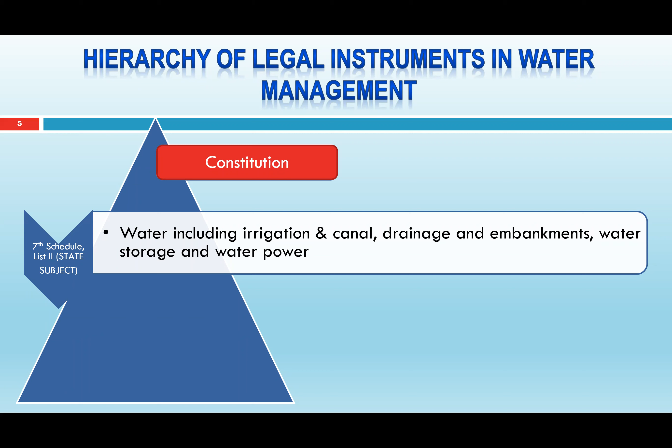But there is a catch in this. As per the 7th schedule, list 1, there is a central subject - when there is a concern of regulation and development of an interstate river. For example, take the Krishna River, which is an interstate river flowing through Maharashtra, Karnataka, Andhra Pradesh, and Telangana. If any one state wants a big project on this river, concurrence of the other states is required.

That's why this becomes a central subject. So if a river is an interstate river, then approval needs to be obtained from the central government with proper concurrence of the other states. And if central government makes an act in parliament that some project has to be executed which will have wide development, then such projects are also treated as a national project. In that case, central government jurisdiction comes into picture.

So basically, as per our constitution, water management is dealt with by the state government, and if there are policy matters or interstate matters, then the subject is dealt with by the central government.

At the second point in this pyramid, there is a national water policy which was published in 2012 by the Ministry of Jal Shakti, Government of India. A draft national water policy is also available on the website, which was published for public opinion and can be reviewed. Very soon we will have a new national water policy.

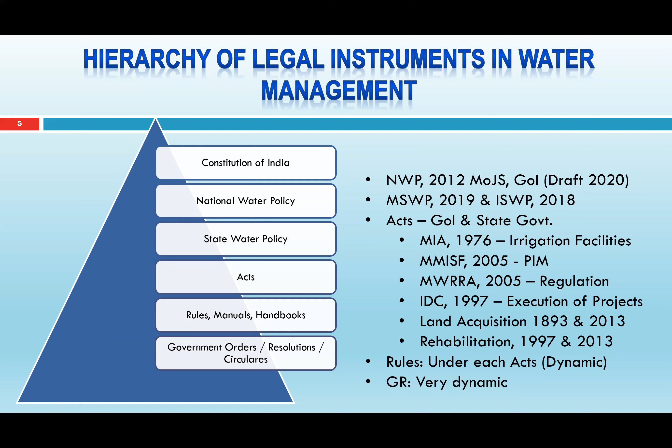So whatever change, suppose any financial power is to be given, that financial power cannot be mentioned in the acts because it is a dynamic figure. It varies because of inflation and several other factors. So such numbers are never mentioned in the acts or rules, and for that GR, or government resolutions, are used. So we will discuss briefly this Maharashtra State Water Policy.

The first Maharashtra State Water Policy was enacted in 2003 and revised in 2019. Its objectives include ensuring clean water and sanitation within the state, building resilience for water scarcity and drought, and having judicious and strategic sectoral allocation. This is a very difficult area to manage.

Sectoral allocation means allocating water for each sector. There are several sectors, for example drinking water sector, agriculture sector, industry sector, environment sector, and so on. So there is always competition between these sectors, and water management is very challenging because available water is limited and each sector demands more and more water.

For example, in Pune city, all the dams constructed on the upstream side of Pune city were planned for agriculture purpose. But as the city developed, the agriculture water has been transferred for drinking purpose. So this diversion of water from agriculture to drinking purpose is a very challenging situation, and it needs to be handled very rightfully without violating anybody's right.

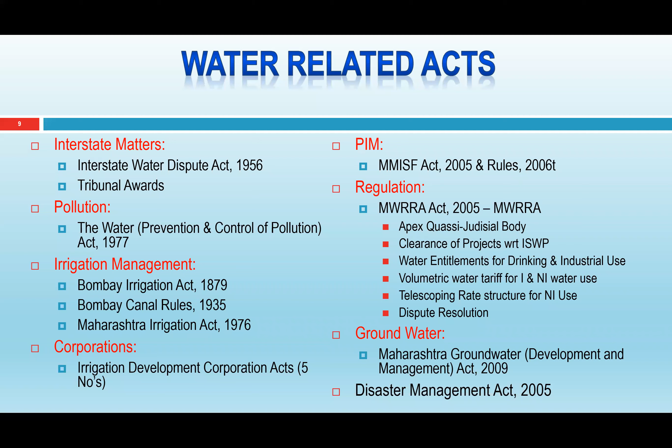In Maharashtra, in 2009, the Maharashtra Groundwater Development and Management Act was enacted. Over and above, there is a Disaster Management Act, which has provisions regarding floods, droughts, and other disasters caused by water.

Participatory irrigation management is a big upcoming area, and to enhance or promote PIM, Maharashtra decided to formulate Water User Associations. WUAs are mandatory for all ongoing projects, and the size of a WUA depends on the area of land holding - for 500 hectares there is one WUA. It is a body of persons including male and female landowners, and this body manages water within their jurisdiction, following tail to head irrigation.

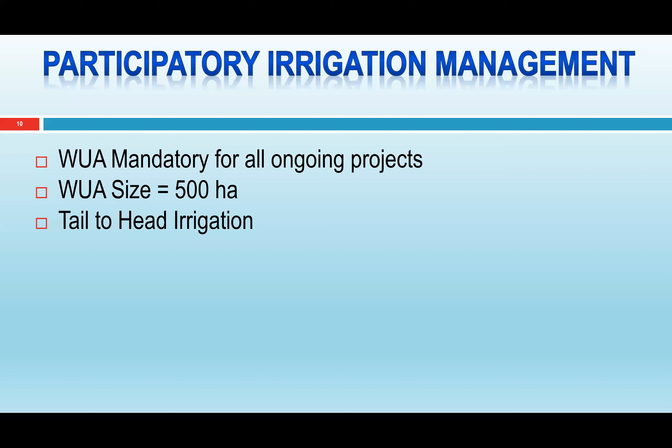If water is released from the canal, it will reach the tail part first and then come to the head. As per water pricing policies, there are concessional water rates for WUAs to promote their formation. Also, an important feature is that we supply water on a volumetric basis. Whatever water charges the WUA gives to the government, 50% of that is refunded to the WUA so that their O&M, operation and maintenance, can be made from these water charges.

Women participation is mandatory as per the Act, and this WUA has crop freedom. This is a very important concept because the Maharashtra Irrigation Act has stringent policies regarding taking up crops. As per this act's provision, the superintending engineer has to make a declaration to all farmers to grow a specific type of crop, and if any farmer does not follow the orders, the superintending or executive engineer is authorized by this provision to not approve water for that farm.

But as per the MMISF Act, the farmer is given crop freedom, so the farmer can grow any type of crop provided that a specified quantum of water is supplied, and he has to manage the entire cropping cycle within that quantum of water. Its structure is a 4 tier structure, which we will discuss in the next slide.

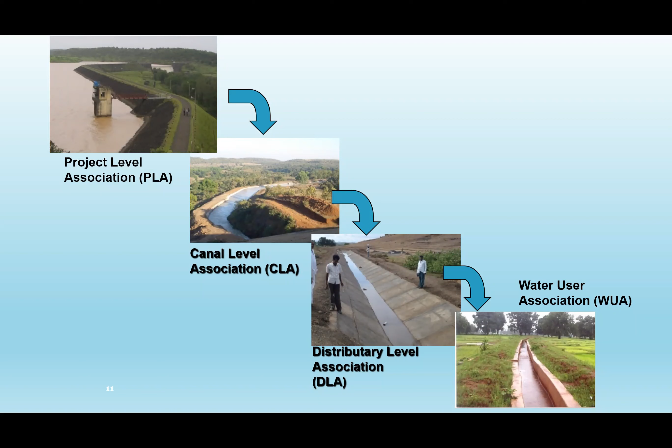Another important policy executed by the Maharashtra government is the piped irrigation network policy, adopted in 2017. As per this policy, instead of conventional canals, a piped irrigation network is proposed. This PIN is successfully implemented in the Tembhu project and is being implemented in the Gunjawani project. In Tembhu, it's a hybrid system, part conventional canal and part covered by PIN, whereas in Gunjawani, water is supplied through pipe network within the entire command area. I will show a small 5-minute video on the Gunjawani project in the upcoming slides.

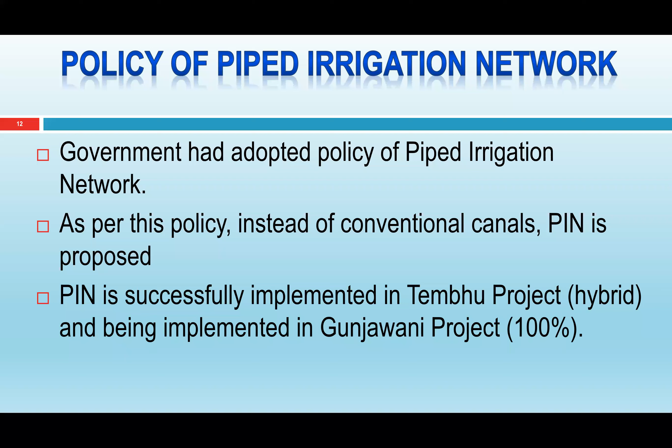So we are clear with the legal mechanism. Now we will discuss water governance.

Water governance is a 3-tier structure. At the top is the Ministry of Jal Shakti, Government of India, whose role is to formulate policy matters, clear interstate rivers or interstate projects, and resolve disputes between various states. At the second level, we have state government, and as per our constitution, water resource management is entrusted to the state government.

Generally each state government has two departments: one managing surface water and another managing groundwater. As per another amendment in the constitution, local self-government has been formed. This local self-government, like Zila Parishad and Panchayat Samiti, manages irrigation projects through their minor irrigation department. So basically we have a 3-tier structure of governance.

At the top level is the Ministry of Jal Shakti, which formulates policies and resolves issues between various state governments. At the middle level is the state government, and at the lowest level is the local self-government.

For Maharashtra, there are several agencies responsible for managing water. For example, the Maharashtra Water Resource Department, the department in which I am working, manages irrigation projects having irrigable area more than 600 hectares. Then we also have the Water Conservation Department, which implemented the Jal Yukta Shivar scheme.

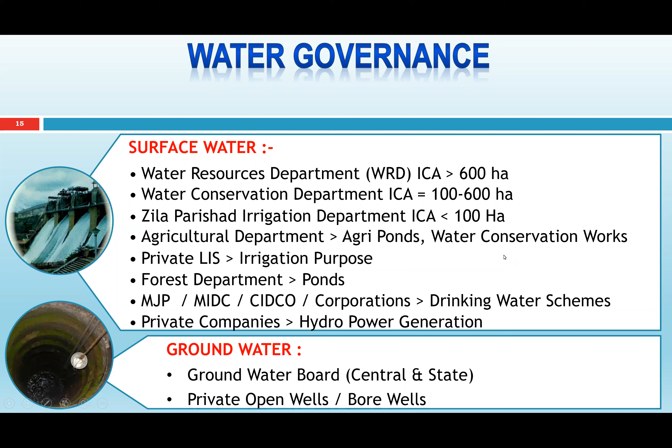In very brief, I will discuss the organization structure of the Government of Maharashtra Water Resources Department. In order to take all policy decisions, there is a Mantralaya, headed by the minister and state minister, supported by the principal secretary, secretary and subordinate staff. The department also has a Chief Engineer for Hydro and Quality Control, a Chief Engineer Electrical managing hydro projects and lift irrigation schemes, and a Chief Engineer Mechanical at Nasik.

At the second level we have the Design, Research and Training wing, headed by the Director General and supported by chief engineers and superintending engineers.

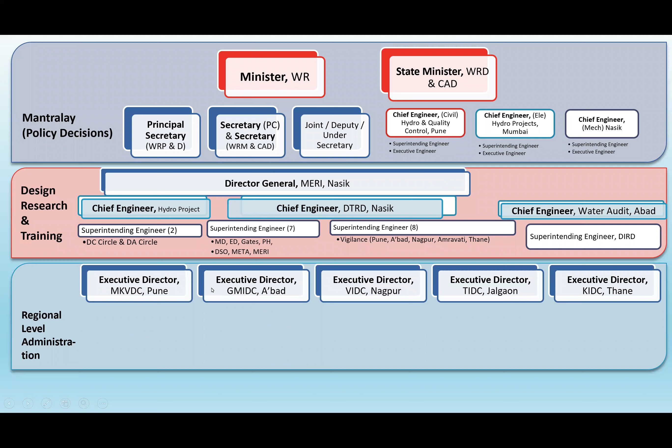At the third level we have regional level administration, with 5 irrigation development corporations headed by an executive director, located at Pune, Aurangabad, Nagpur, Jalgaon and Thane. These IDCs are supported by chief engineers and superintending engineers, and at the lowest level for execution of works and water management, there are superintending engineers, executive engineers, deputy engineers and sectional engineers. This encompasses the governance structures in Maharashtra.

So in the second part, we will discuss the water infrastructure.

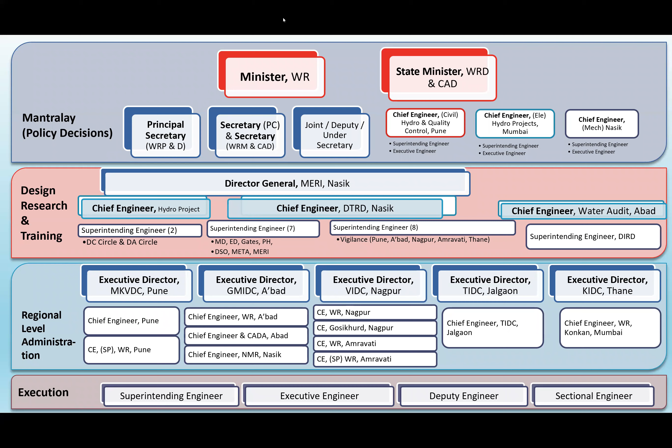Okay, good. I think I have nearly less than 1 hour, so I will go a little fast. In this part, we will discuss the water infrastructure.

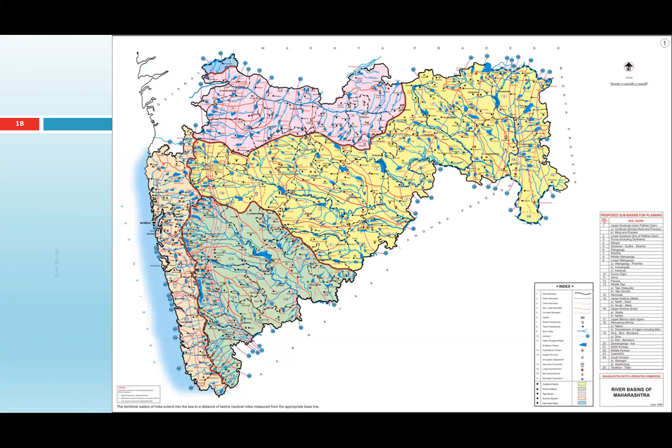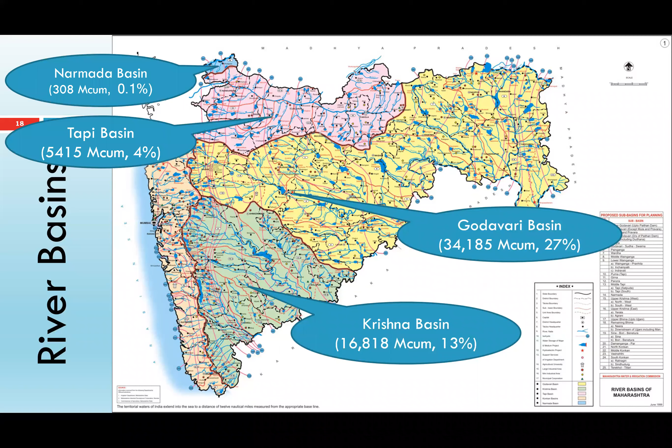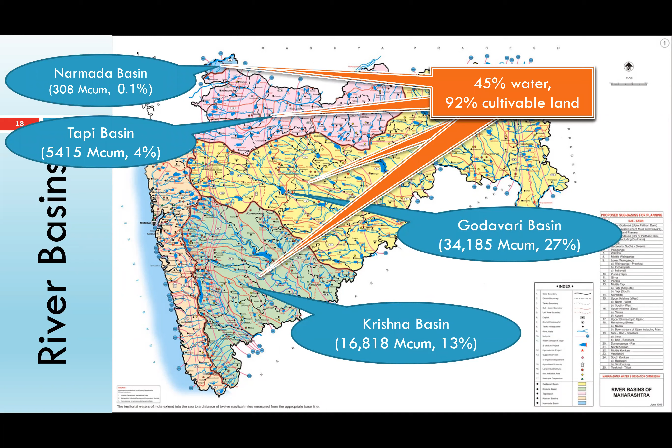And there is an important basin in the Konkan, known as the west flowing rivers, which has about 55% water and only 8% cultivable land. There is also a very small part of the Mahanadi basin in the eastern side of the state, but from a hydrological calculation perspective, that basin has not been accounted for.

So in a nutshell, from a hydraulic perspective, Maharashtra has 5 river basins, subdivided into 25 sub basins, and these 25 sub basins have been divided into 1,505 watersheds. The yearly rainfall of Maharashtra ranges from 400 to 6,000 millimeters, and the average rainfall across the state is 1,067 millimeters. But there is spatial and temporal variation, and if you understand these statistics, you will realize why water management is very difficult.

In our country, water is made available primarily through rainfall, and generally rainfall occurs during the monsoon season, which lasts 4 months in a year. If in these 4 months we count the actual number of rain days, it has been observed on average over the last 10 years that there are only 40 rain days in the 4 months of monsoon season. If we count the actual rain hours within these 40 days, the number comes to 96 hours - that means effectively only 4 days in a year. So the task of a water manager is very difficult.

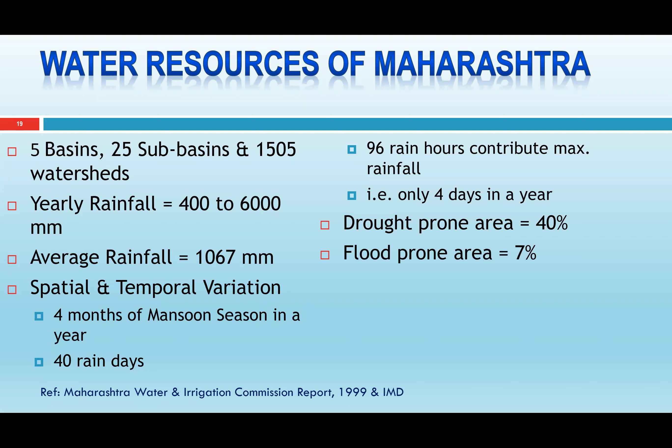Water managers have to collect the water made available through rain into their dams, and the time for this collection is only 4 days. They have to manage this water for the entire year without causing any flood or drought, which is why this task is so challenging. In Maharashtra, 40% of the area is drought prone, 7% of the geographical area is flood prone, and there are 148 tahsils of the state that are drought prone. At the country level, there are 971 tahsils which are drought prone in nature.

In Maharashtra, development of irrigation started with tank and well irrigation, and in Satara there is a Bara Motechi Vihir - Vihir means well - and irrigation actually started from this well. In the Vidarbha region there are Malguzari tanks, and irrigation started through these tanks.

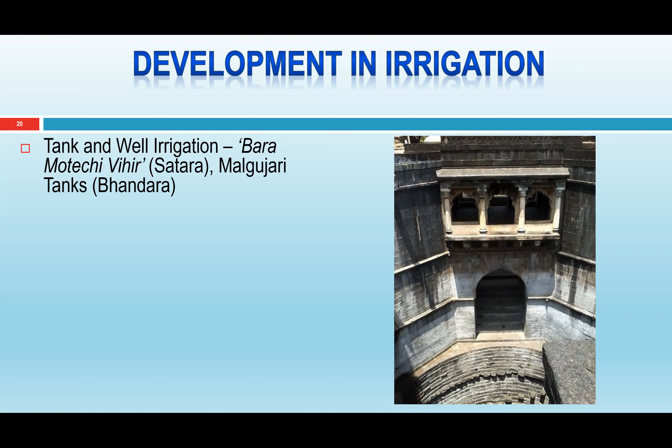During the British era, they constructed several big dams. During the period of 1885 to 1930, they constructed several large irrigation schemes, which are very huge irrigation projects, including Khadakwasala irrigation project, Bhatgar project, Godavari irrigation system, Bhandardara irrigation project, and Pravara system. Each of these projects is known as a system, like Bhatgar Nira system, Khadakwasala system, Pravara system.

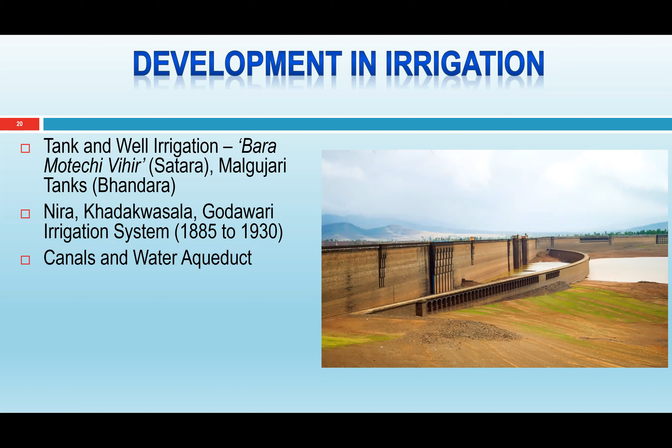And they stored the water. In the next slide, I will show the topography of the state, and you will realize why they constructed dams and a network of canals in order to provide water to the drought-prone area. Then they constructed a huge network of canals and water aqueducts. This is a photo of a water aqueduct in which water is being transported from the dam to the command area. They also constructed some tunnels.

After post-independence, there was a boom of irrigation development in the state, and several large-scale irrigation projects were undertaken in the state. In this slide, I will just explain briefly the topography of this state.

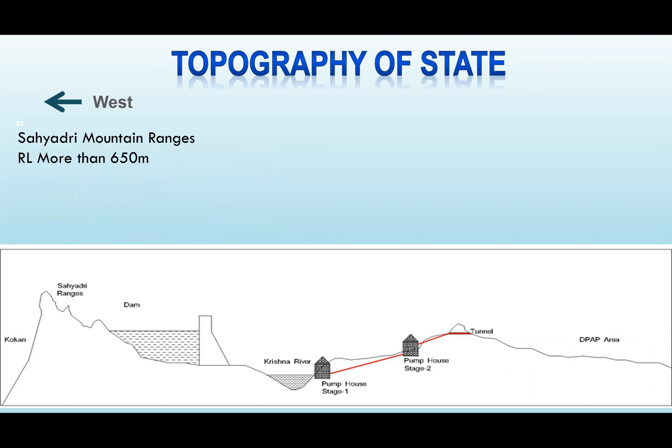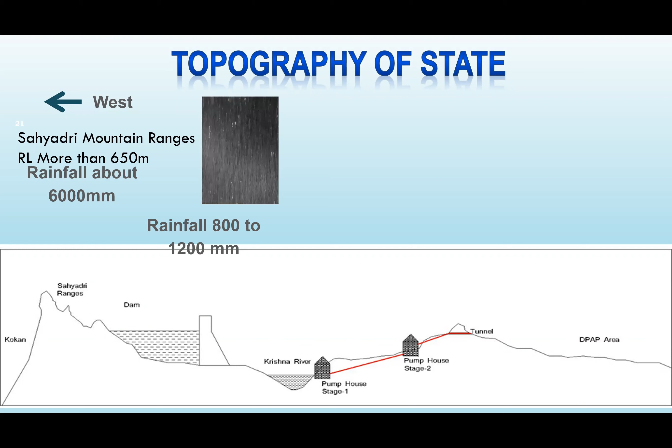On the west side, there is the Sahyadri mountain range. The height of the Sahyadri mountain is more than 650 meters from mean sea level, and rainfall is about 6,000 millimeters. So there is huge rainfall in the ranges of Sahyadri mountain, which is part of the Western Ghat. So in the British era as well as post-independence era, the Water Resource Department constructed dams at the valley. At the dam location, rainfall varies from 800 millimeters to 1200 millimeters. And the area which is actually cultivable lies on the eastern side of the state, whose average elevation is about 500 to 600 meters from sea level.

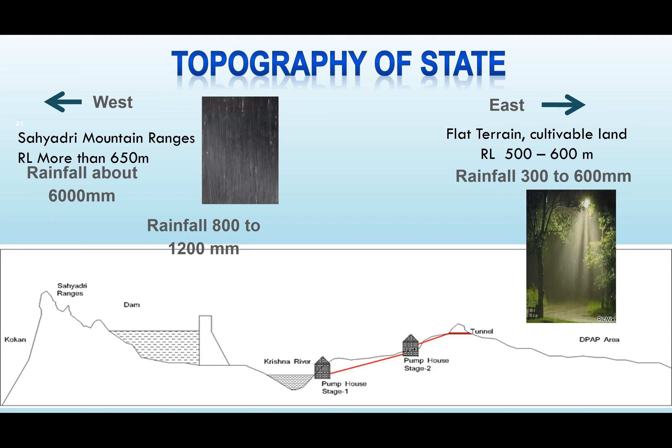So we are fortunate to have ample water available through rain on the western side at a quite higher elevation, and on the eastern side we have cultivable land. So the Water Resource Department decided to construct a series of dams. On the eastern side, rainfall is hardly 300 to 600 millimeters. As discussed in the last slide, 55% of the water is available on the western side, and the other 92% of the area is dependent on only 45% of the water. So most of the dams are situated in the Sahyadri ranges, and there are networks of canals as well as lift irrigation schemes and tunnels in order to divert this water from the abundant area to the drought-prone area.

And there are several lift irrigation schemes, so water is being lifted from one elevation to another elevation. This is a photo of the Purandar lift irrigation scheme from Pune. Every year this scheme lifts 4 TMC of water. TMC means 1000 million cubic feet. It irrigates about 25,000 hectares of area. Water is lifted for about 356 meters of head, in 6 stages of lifting.

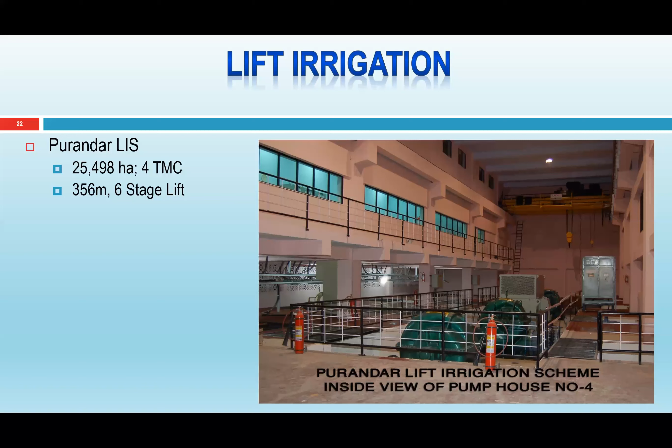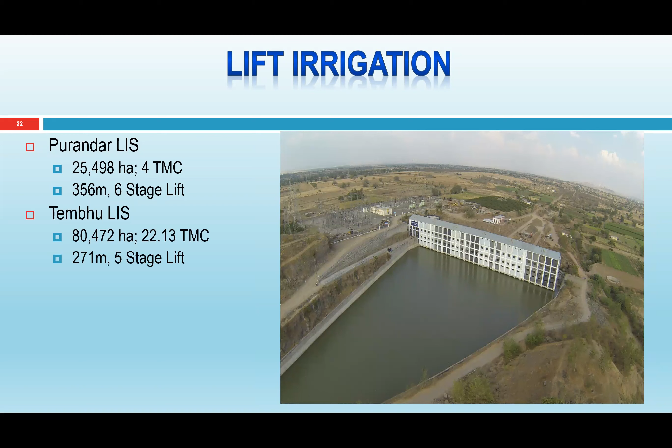Then we also have the Tembhu lift irrigation scheme, which is one of the biggest schemes in Maharashtra. About 22 TMC of water is used every year. It irrigates 80,000 hectares of area, and water is lifted in 5 stages. We also have the Krishna Koyna lift irrigation scheme, which irrigates more than 1 lakh hectares of area, and it is also a multi-stage lifting project. From this photo, and from the last slide where we discussed the topography and rainfall pattern, you will realize that it is essential to have lift irrigation projects in the state.

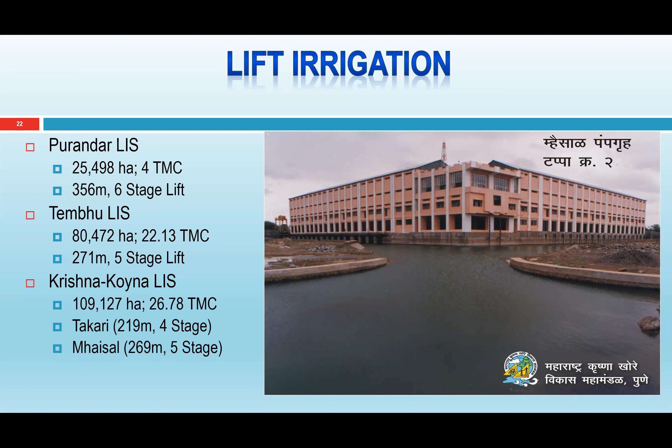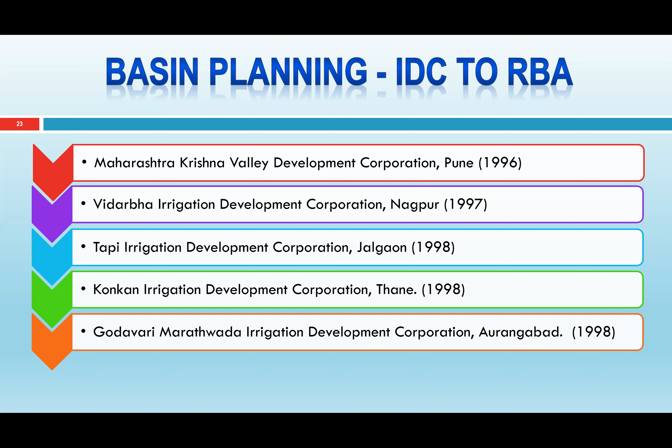So how is water infrastructure constructed and managed? Water infrastructure is constructed based on the basin planning approach. In Maharashtra, we have irrigation development corporations, which are converted into river basin agencies. For western Maharashtra, we have the Maharashtra Krishna Valley Development Corporation. For Vidarbha Valley, we have the Vidarbha Irrigation Development Corporation, then the Tapi Irrigation Development Corporation, Konkan Irrigation Development Corporation, and we also have the Godavari Marathwada Irrigation Development Corporation.

So why do we basically plan for a water resource project? The first purpose is to have an assured source for drinking or domestic use. The second use is to have irrigation facilities. Third, to supply water for industries. Fourth, to generate electricity through hydropower schemes. And last, for flood protection. So these are the purposes of conceiving a water resource project.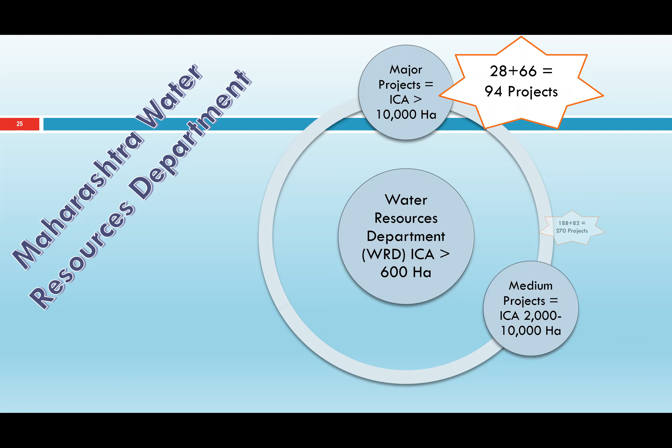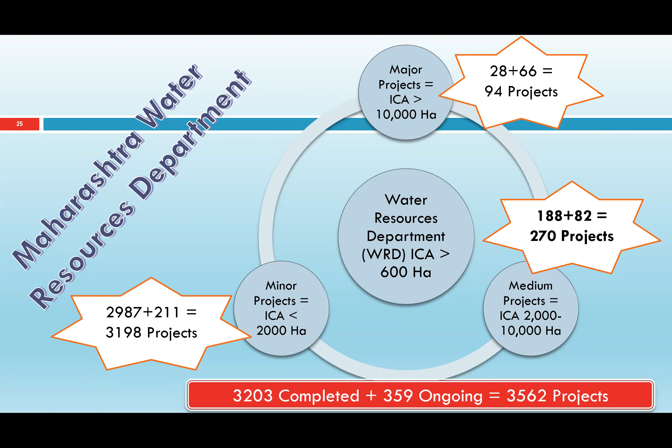In medium project category, the command area lies between 2,000 hectares to 10,000 hectares, and there are 188 completed and 82 ongoing projects. There are about 2,987 completed and 211 ongoing minor projects, having irrigable area less than 2,000 hectares. So in a nutshell, in Maharashtra there are more than 3,000 completed projects and 359 ongoing projects, and this pie chart shows the number of irrigation projects in Maharashtra.

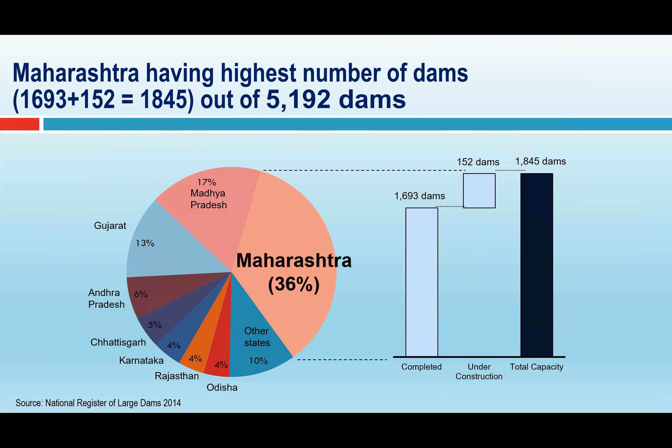Maharashtra has the highest number of dams in our country. About 36% of dams in the country are in Maharashtra. But still, if you see the water management situation in Maharashtra, it is not that good. In the next slide, we will discuss the reason for this.

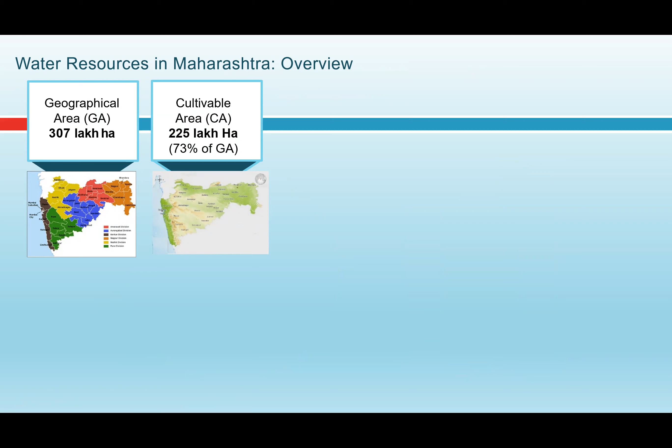The geographical area of the state is 307 lakh hectares, but cultivable area is 225 lakh hectares. Because of forest land and urbanization, the entire geographical area cannot be irrigated. So cultivable area is only 73% of the gross geographical area.

It has been assessed that from surface water, we can irrigate only 85 lakh hectare area. So out of 225 lakh hectare cultivable area, 85 lakh hectares can be irrigated by surface water, that means dams, canals, rivers, etc. About 41 lakh hectare area can be irrigated by groundwater.

A larger chunk of the cultivable area is irrigated by rainfed irrigation. 44% of the cultivable area is currently irrigated through rainfed agriculture.

As far as the Maharashtra Water Resource Department is concerned, the target of MWRD is to have irrigation facility over 85 lakh hectare area. If we compare this target, as of now, the department has created irrigation potential on 51 lakh hectares. That means irrigation facilities are created on this area, but that is actually the potential, not utilized.

We had created irrigation infrastructure on 51 lakh hectare area, meaning there is a dam, there is a canal, and we can supply water to the land. But the actual irrigated area is 42 lakh hectares, and there is a gap between potential created and potential utilized. This is also a research topic, why there is a gap, although we had incurred expenditure and created the infrastructure.

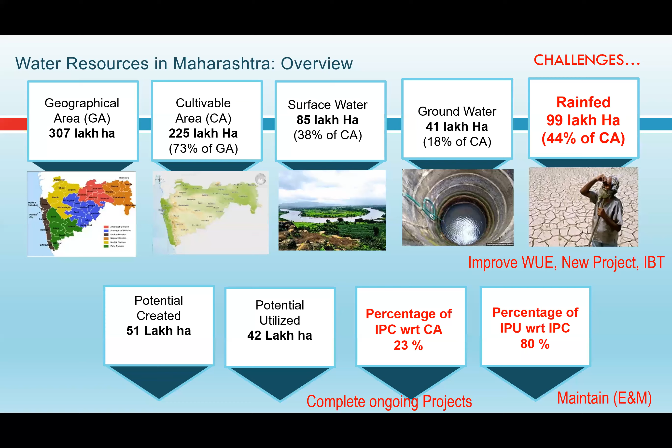Digvijay has raised his hand. Digvijay, please go ahead. Yeah, sir. Okay, hello sir. Sir, recently in the last 3 years, we have seen that 2 times the flood has come to Kolhapur and Sangli districts. So are there any flood mitigation measures or any plans that are planned by the water department?

You might have heard about the Vadnere committee. The government established a panel of experts in order to identify the reasons for the flood and to suggest remedial measures to avoid upcoming floods. That committee had submitted their report. I was also invited for that committee, and the report is available on the WRD website. This is a holistic report, and we need to understand the reason of flood, and then we will have a mitigation strategy. So the number one cause of flood is extremely high intensity rainfall within a short duration.

I had mentioned the average rainfall of the state is 1067 millimeters. In this year as well as in the last year, this average has not shifted too much. But what happened?

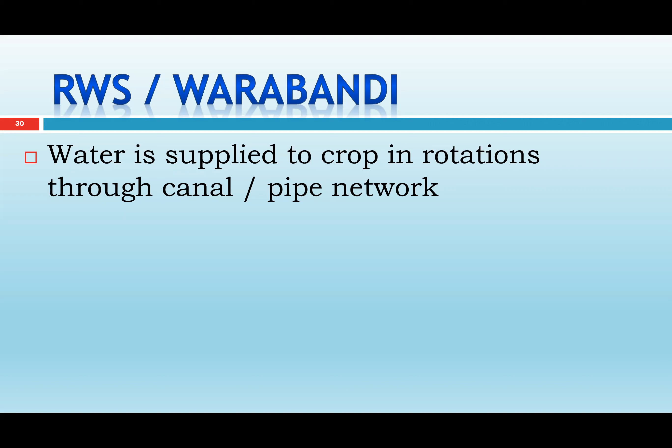This quantum of water is supplied through the canal, and it is anticipated that at every 15 days interval, water will be supplied to the crop. This is called Warabandi, an Urdu word where Wahr means turn and Bandi means fixation. So turn by turn water supply after a fixed schedule is Warabandi, and generally in Maharashtra, this pattern is followed.

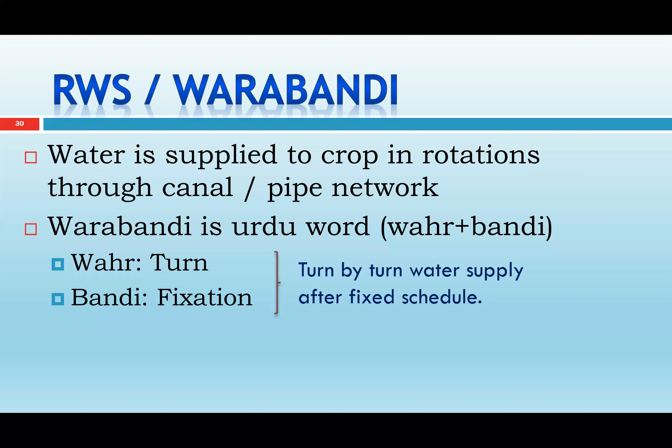There are legal provisions backing this mechanism. In Maharashtra, canal operation is governed by the state water policy as discussed earlier, then the Maharashtra Irrigation Act 1976 and Bombay Canal Rules 1934. Water is supplied to the individual farmer based on area and crop, and since the superintending engineer issues a notification on which crop has to be grown, water is supplied through the canal based on that crop.

As per the Maharashtra Cooperative Societies Act 1960, as well as the MMISF Act discussed earlier, these two legislations support water user association formation, and water is supplied on a volumetric basis to the WUA. Then there is the PWD handbook, chapter 25, on irrigation management, and the MMISF Act for participatory irrigation management enables volumetric water supply to the WUA, along with various GRs and circulars.

The first stage is preparation of PIP, which means preliminary irrigation program. This is a program for how water will be supplied for various sectors, how many rotations there will be, when to start the rotation, and when to end it. So this is a preliminary program.

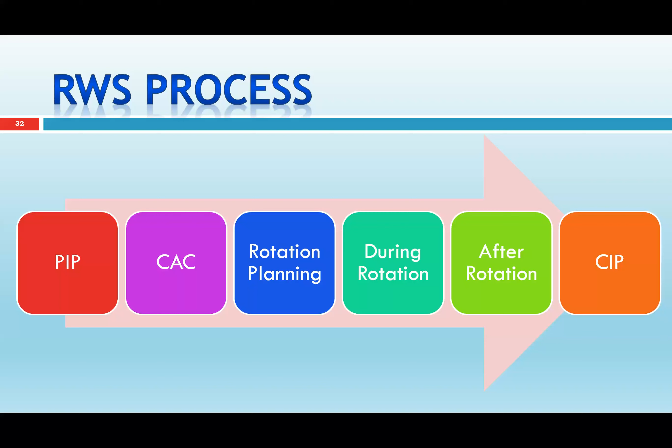Then the fourth stage is during rotation, where several activities need to be carried out while the rotation is going on. Rotation means supply of water from the dam to the canal to the individual farmer, and activities required include measurement of the crops and billing of the crops. Ultimately we have the CIP, the completed irrigation program. So we start with the PIP and end with the CIP.

So what is a PIP? It is a preliminary irrigation program, and in Maharashtra, water planning is done as per the date of the GR, the government resolution. As per this provision, a preliminary irrigation program is prepared for all projects, with specific guidelines for the normal year and the deficit year.

If in any year the IMD, Indian Meteorological Department, declares a possibility of drought in the next year, then our PIP will be different, and if it is a normal or average year, our policies are different. So PIP is prepared for every season and approved by the superintending engineer of that concerned project, and water allocation is based on the directives of the state water policy, which mentions the priority of water use.

First priority is given for drinking water purpose, second priority is for agriculture, third is for industrial use, and so on. We also have to make provision for water entitlements, non-irrigation agreements, and demand for drinking water supply, etc. Considering all these requirements, we formulate what storage is available in a dam and what our probable uses are in each season. There are basically three seasons.

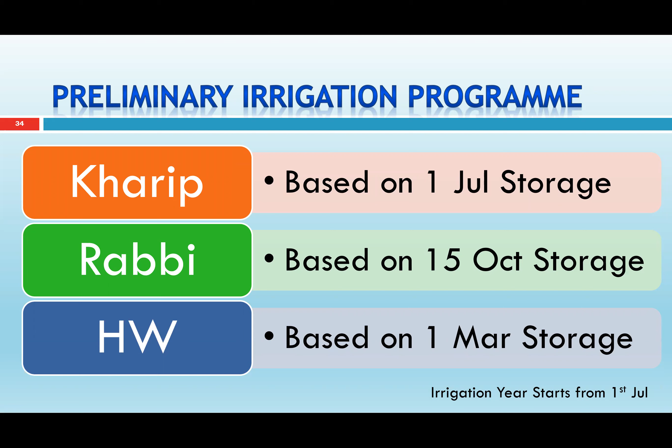For the Kharif season, water planning is done based on the storage in the dam on 1st of July. For Rabi water planning, the storage date considered is 15th October, and based on the water storage availability in the dam on that date, Rabi water planning is done. For the third season, the hot weather season, water planning is done based on storage on 1st March. This is the fixed guideline for water planning.

So in brief, I will discuss how water planning is made, in this case for the Rabi season. On 15th October, whatever quantum of water is available in storage in the dam, we take that quantum.

Then we deduct the probable evaporation loss. In Maharashtra, or in our country, or anywhere on the planet, about 20 to 25% of water gets evaporated every year, so we have to take provision for this evaporation loss. This data is available with the dam engineer, and we have pan evaporimeters installed across various dams, and based on that data, we deduct the evaporation.

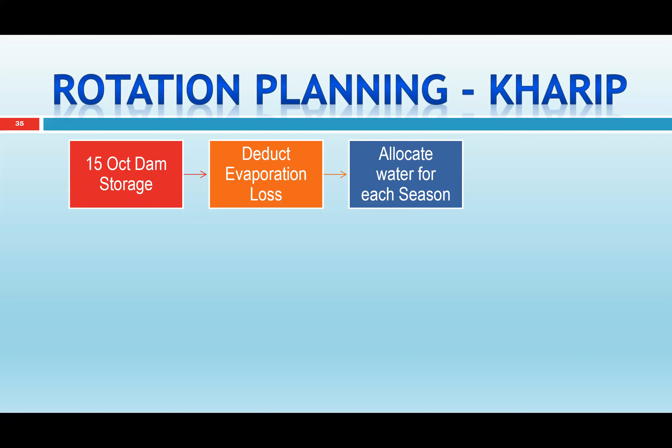Then we allocate the water for each season. Suppose we have 100 TMC water, 20 TMC is evaporation, and remaining 80 TMC we will allocate for each season. For Kharif season, we may have 20 TMC. For Rabi season, we may have 40 TMC. And again for hot weather season, we have 20 TMC. This allocation is done based on the project planning report.

Then we allocate water for irrigation, drinking, and other non-irrigation use. So whatever water is available in a Rabi season, for example 40 TMC is available, out of that how much water is to be allocated for irrigation, how much for drinking, and how much for non-irrigation, this calculation is done.

Then once we finalize the irrigation quota, for example in Rabi season, out of 40 TMC of water, if we give 30 TMC for irrigation, then we will plan for number of rotations. So 30 TMC water will be supplied in about 6 rotations, maybe 5 TMC in each rotation. Then we will propose the start date and end date of rotation, and prepare the irrigation schedule.

And as I mentioned, we follow tail to head. So water will reach at the tail. Suppose a canal is 100 kilometers long, then once we release the water, it will reach the tail portion. So we will carry out the irrigation activity at the tail part, and then come to the head.

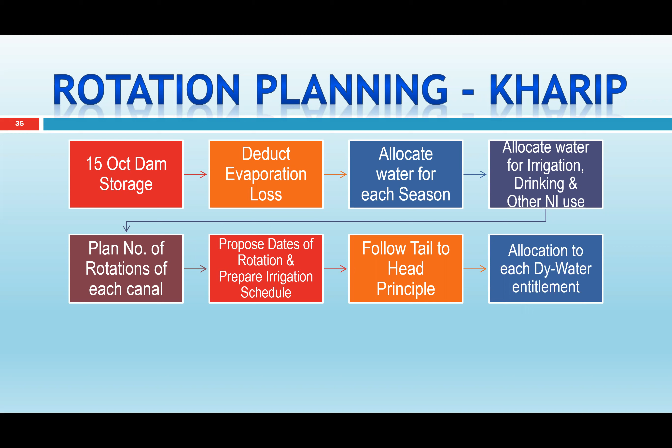Then allocate the water for each distributory. In the next slide I will discuss what a distributory is. So we will make allocation for each distributory, it is a sub canal.

Once this planning is done, it is approved by the superintending engineer. And then finally we prepare a Shejpali Patrak, which means a list of farmers with date and time mentioned before their name. This document tells who will be the first farmer to get water, who will be the second farmer after the first, and so on. So this is just a timetable of water distribution.

Then the next activity is to propose this planning to the Canal Advisory Committee, discuss with the stakeholders, get approval, and start the irrigation program.

So I had mentioned about the Canal Advisory Committee. This is the structure of the Canal Advisory Committee, related to the classification of projects. For major projects, the chairman is the Honorable Minister of Water Resources or Palak Mantri, the Guardian Minister, and the member secretary of this committee is the concerned superintending engineer.

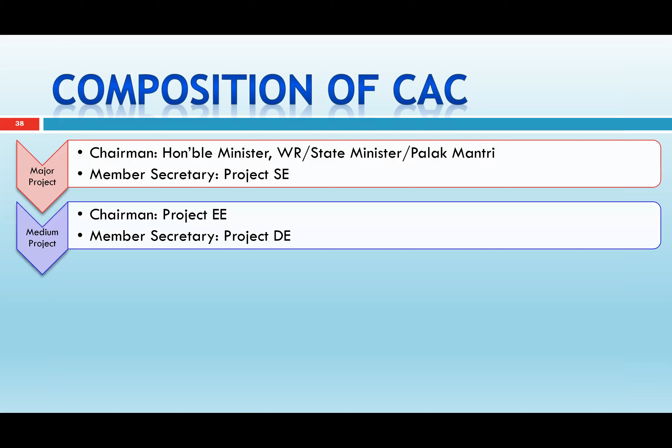Then for medium projects, the chairman is the concerned executive engineer, and member secretary is the project deputy engineer. For minor irrigation projects, the chairman is a deputy engineer, and member secretary is the sectional officer.

The members of this committee include official members and other members. Official members include officers from Water Resource Department, Revenue Department, Agriculture Department, Water Supply Department, MIDC departments. And there are public representatives such as ministers from state government, central government, MPs, MLAs, chairmen of sugar factories, district agriculture market produce committee, and representatives from Water User Association.

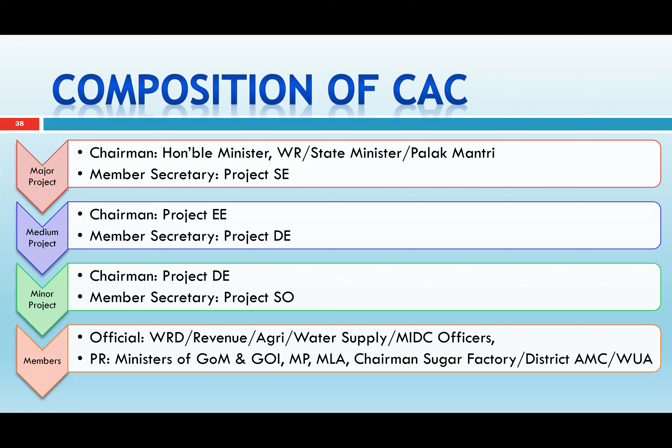So in order to have control on this rotation, we have technical staff. The superintending engineer is in charge of the circle and has to exercise overall control of the irrigation activity. Under his jurisdiction there are 4 to 5 divisions, headed by executive engineers. For each canal there is one executive engineer, or for 2 or 3 canals there is one executive engineer. And below the executive engineer, we have deputy engineers.

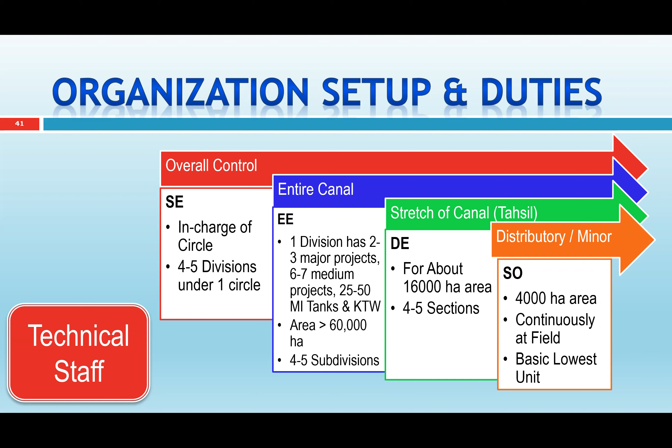Generally for one tahsil, there is one deputy engineer, and then we have a sectional officer. This is the last technical unit where water management and accounting is carried out. In order to support this technical personnel, we have support staff.

For record keeping, we have Daftar Karkun and a measurer who measures the water use and maintains the gauge register - what gauge is available in the dam and at various locations of the canal. He also measures the area irrigated, prepares the bills, and collects the revenue.

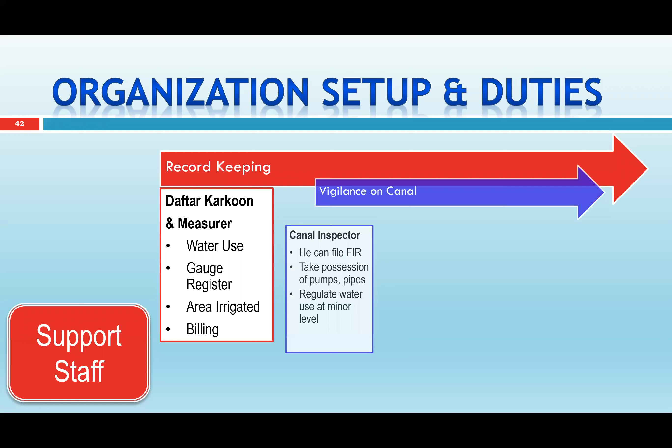Then we have a canal inspector who visits the canal across the season and can file an FIR if there is unauthorized use. He can take possession of pumps and pipes if he finds theft of water, and he tries to regulate the water at the local level.

For communication, we have a Sandeshak who communicates from the lowest level staff up to the executive engineer. And at the last, for gate operation, there is a canal chowkidar who operates the gates of the canal.

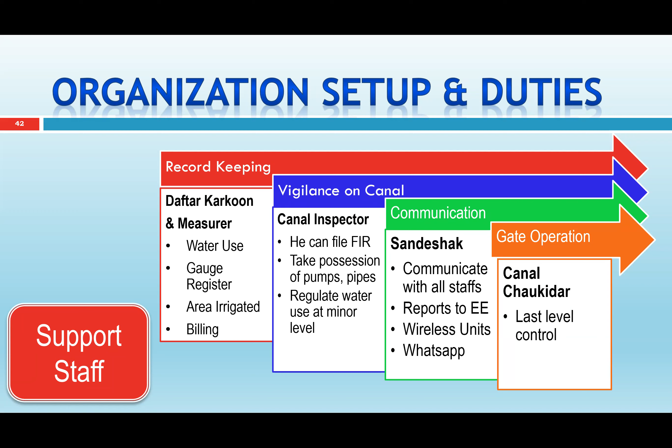These personnel manage the rotation activity, and after rotation they prepare a completion irrigation program, known as CIP. They compile information such as area irrigated in that rotation, quantum of water used, and action taken on unauthorized irrigation, and they prepare a water audit report and benchmarking report. These reports are available on the WRD website - you can go through them to get an idea of what they say.

Then the important task after rotation is to prepare a water assessment report and get it approved by the executive engineer. This report says that a particular farmer irrigated this much quantum of land, this many hectares, and grew sugarcane or whatever crop. So as per MWRRA water pricing, he has to pay this much amount of fees. Preparation of the assessment report and collection of revenue is an important task after rotation.

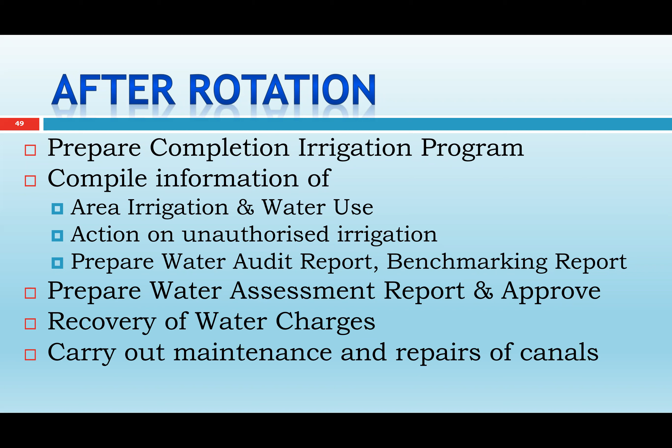Apart from this, these people also carry out regular maintenance and repair of the canal works.

Since only 10 minutes remain, I will briefly go through the piped irrigation network. Why is there a need for piped irrigation? As discussed, about 80% of water is used in the agriculture sector, and design efficiency of conventional canals is 45 to 50%. But actual efficiency, because of theft and water loss from improper maintenance, comes out to be only 15 to 20%. So it is necessary to increase this efficiency to satisfy the needs of other sectors including agriculture.

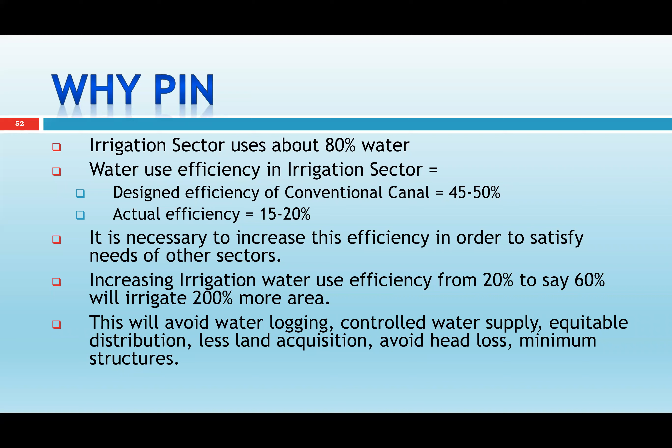If we increase irrigation efficiency from 20% to say 60%, then we can irrigate 200% more area. This will also avoid waterlogging, control water supply, ensure equitable distribution, cause less land acquisition, avoid head loss, and require minimum structures along the alignment.

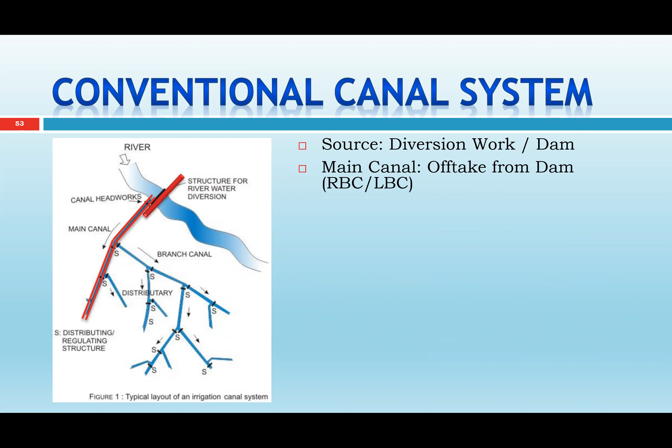In this slide, I will brief you on how a conventional canal system looks. There is a river, and a diversion structure known as a dam. Then there is a main canal taking off from the diversion structure, and generally there are two canals - one taking off from the right side and another from the left side, known as the left bank canal and the right bank canal. The canal taking off from the main canal is known as a branch canal, and there is a specification that its discharge should be more than 3 cubic. Then there is a distributary, then a minor, and then a field channel. This is the skeleton network of the conventional canal system.

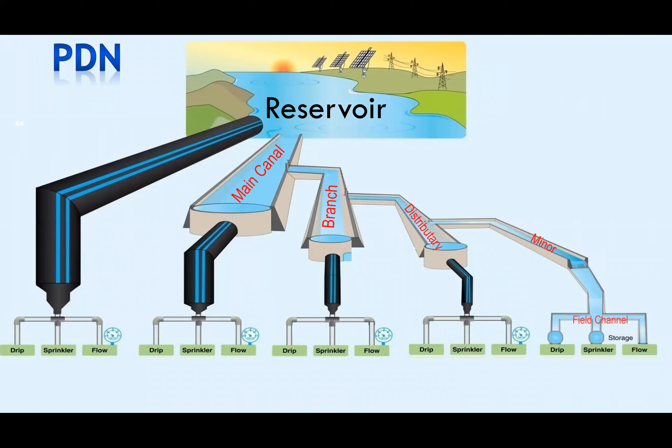In PDN, we have several combinations, so a hybrid PDN is also possible - a reservoir, main canal, branch canal, distributary canal, minor canal, field canal, and ultimately the field. The efficiency of the project is calculated by multiplying the efficiency of the individual components.

For example, efficiency of the conventional canal distribution network is calculated from the field application efficiency - how water is supplied to the field - then field channel efficiency, and canal efficiency. CDN efficiency is the multiplication of these three efficiencies, and design efficiency is about 34%. This figure shows that if water is supplied through main canal, branch canal, distributary, minor, and field channel, and the farmer adopts flow irrigation, then total irrigation efficiency is 34%.

If he shifts from flow irrigation to sprinkler irrigation, efficiency increases to 42%. And if he shifts from sprinkler irrigation to drip irrigation, efficiency increases to 50%. So because of the increase in field application efficiency, the efficiency of the entire project increases from 34% to 50%.

Suppose we convert the field minor and field channel into pipe networks. Then flow application becomes 39%, sprinkler 49%, and drip 59%. If we replace the entire distributary and below network into pipe distribution, efficiency increases to 45%, 56%, and 68%.

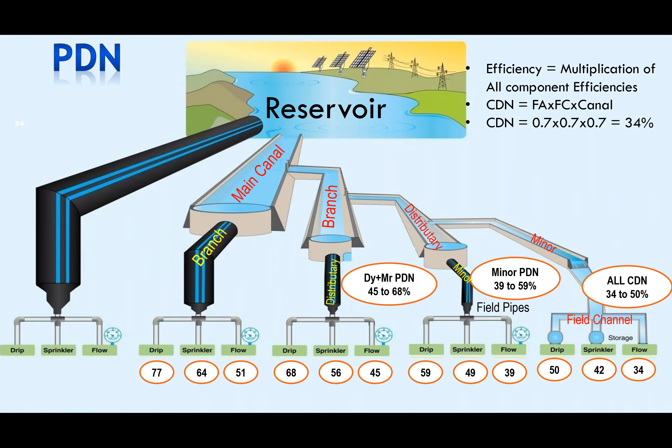At the second last level, if we replace the entire canal network below the main canal into pipe distribution network, our efficiency will be 51%, 64%, and 77%. And at the highest level, if we replace the entire distribution system into pipeline, our efficiency will be 59% for flow, 74% for sprinkler, and 89% for drip.

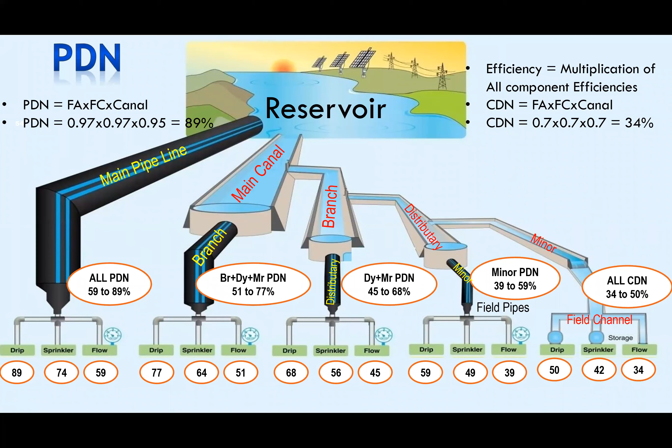So in a nutshell, by adopting pipe distribution network, we can have about 90% irrigation efficiency. From conventional canal, the efficiency is only 34%. So there will be higher water use.

So I will just show this 5 minute video.

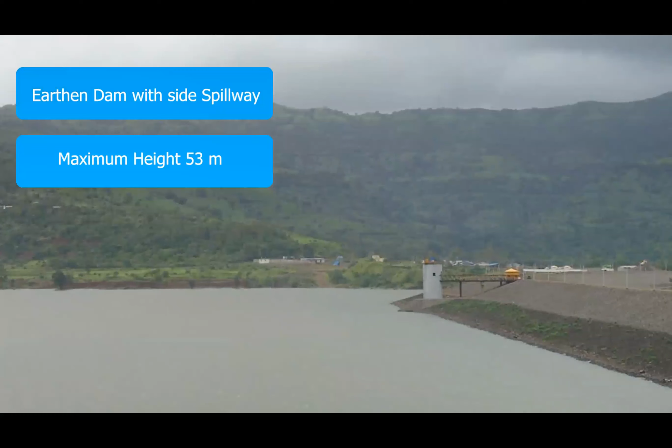The project consists of an earthen dam with side spillway. Maximum height of dam is 53 meters. Storage of 104 million cubic meters, which is 3.67 TMC. Annual utilization is 118 million cubic meters, which is 4.19 TMC. The spillway has 2 radial gates.

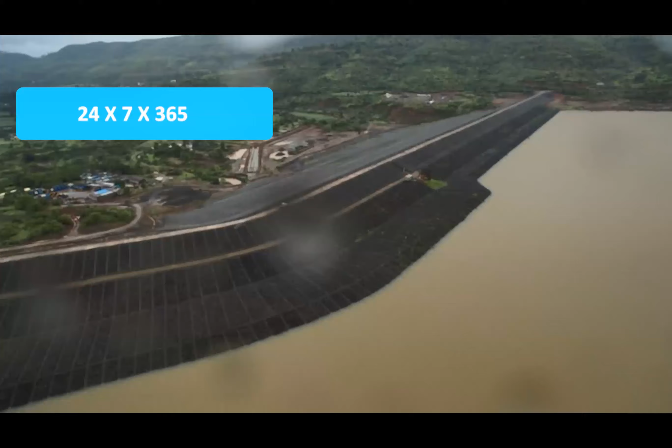The project also offers some features which collectively make it a truly unique project. Water will be available 24/7 throughout the year, with a piped irrigation network up to the farm. Water can be seen only either in the dam or at the root of the crop, with a minimum 20 meters pressure head at each farm of 3 hectares.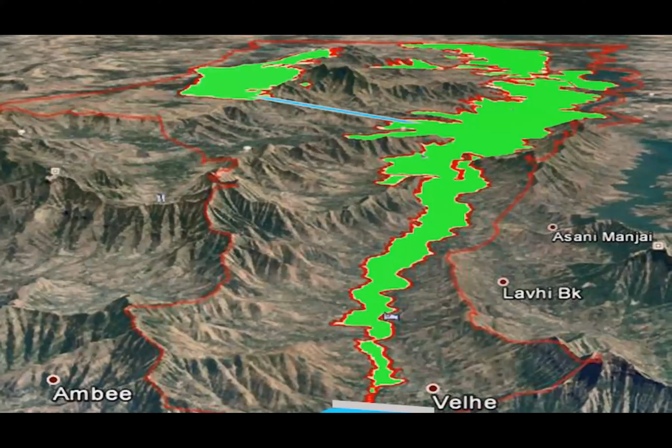Command area is 21,392 hectares in Velhe, Bhor, and Purandar. Out of this, 12,872 hectares is a drought-prone area in Bhor and Purandar Taluka. Narayanpur lift irrigation system of 2 stages with head up to 281 meters.

Command area of Narayanpur lift irrigation system is 5,400 hectares. The system is fully automated with SCADA system. 173 water user associations are planned. This project is divided into 2 parts.

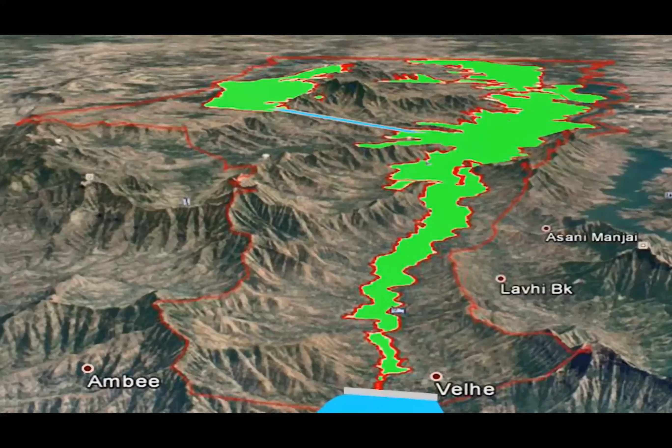The first part is the first one of its kind in India. It's a stretch of 86 kilometers main pipeline covering 16,000 hectares, approximately 75% of the command area, and works on the gravitational head of the dam. Since there is no energy used in this system, a huge saving in power is achieved. Despite the absence of power, the system is capable of providing minimum pressure required for drip irrigation.

The second part is a lift irrigation scheme named Narayanpur, which starts from 58 kilometers of main pipeline. The water is lifted through pumping at a height of 150 meters. This irrigates 5,400 hectares of land in the Purandar Taluka.

This project offers an automated, pressurized, equitable distribution network, which is ready for micro-irrigation for an area up to 3 hectares. The unique feature of this project is that it makes the water available 24/7 for irrigation throughout the year to the farmer.

We have thus improved the water efficiency up to 35% by changing from the conventional way of open canal irrigation to pipe distribution network. This transformation has also recorded a massive cost reduction of 30%. Additionally, a known social and economic challenge of land acquisition can be overcome by using this system as against the conventional way. Considering an adequate supply of water, the quality and quantity of crops can be drastically improved. This, in turn, can enhance the social upliftment of the farmers in this project area. This will also have a positive impact on Pune's market.

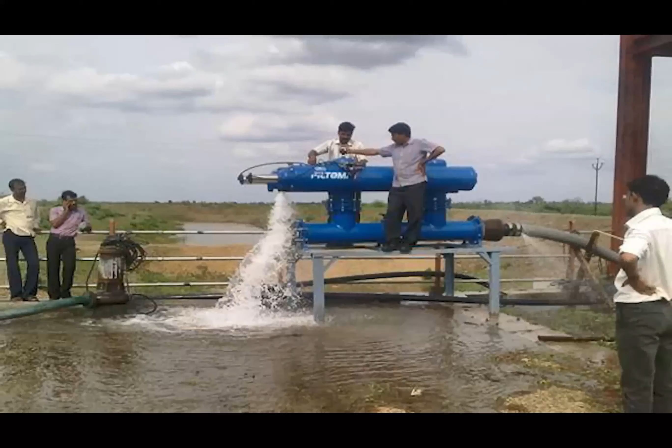Primary and secondary auto filters have been installed which are necessary for drip irrigation. Residual pressure at 24 hectares chak ready for drip irrigation. Remotely controlled up to 3 hectares sub-chak with a centrally located unit.

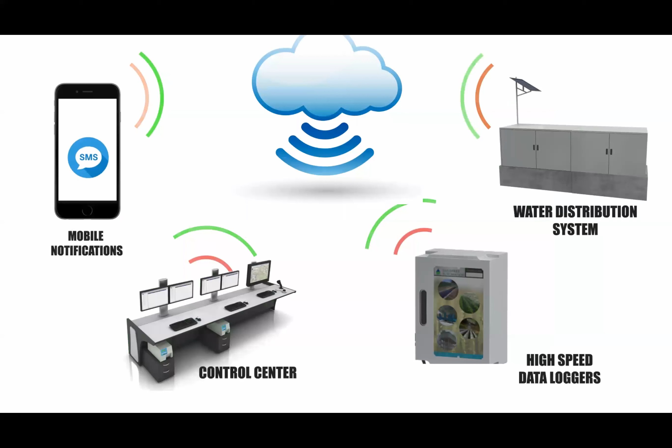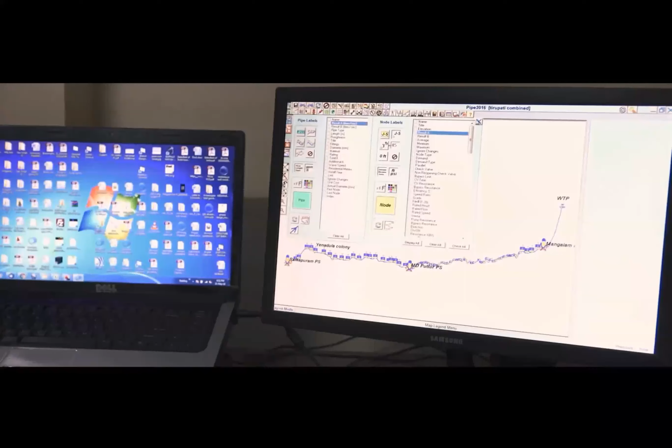Wireless, energyless communication system by radio or GPRS. Vandalism alerts. SMS alerts to farmers. Officials can access the system through internet on their computers or smartphones. Reports and data logs available on computer. Smart devices like outlet management system, distribution management system, project.

So this is the last part. This was the example of the Gunjawani irrigation project, executed at Pune, which is a 100% pipe distribution network. I think I have only 5 minutes, so I will briefly complete my presentation with this last part discussing the challenges and way ahead.

Basically, while doing water management, we have external challenges and internal challenges. External challenges include water scarcity, temporal and spatial variation in rainfall, uneven spatial availability of water - 55% of water is available in one basin and 45% in the rest. Then we have decreasing per capita water availability, and changing land use pattern.

More and more land is coming under urbanization, which is a concern for irrigation management. Small land holding is an issue. Diversion of irrigation water for non-agriculture use, for example domestic use, and the impact of climate change.

From the internal department side, there is aging infrastructure, and equitable water distribution with robust infrastructure is a big challenge. Completion of ongoing projects is an issue. Empowering participatory irrigation management is a challenge. We discussed water quality - it is a very important issue. Improving the productivity of water, and lastly, capacity building of all stakeholders is the challenge.

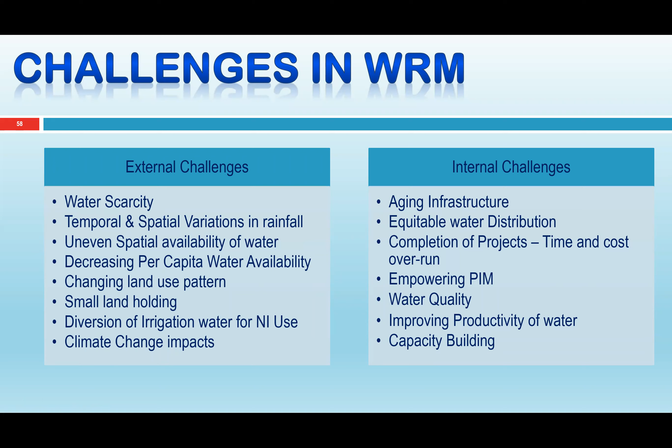There are several upcoming areas in this domain, for example riverfront development projects, water transportation, river linking, upgradation and modernization of old irrigation infrastructure. Then disaster management, including drought management as well as flood management. There is also a draft National Water Framework Bill 2016 and draft Dam Safety Act 2019.

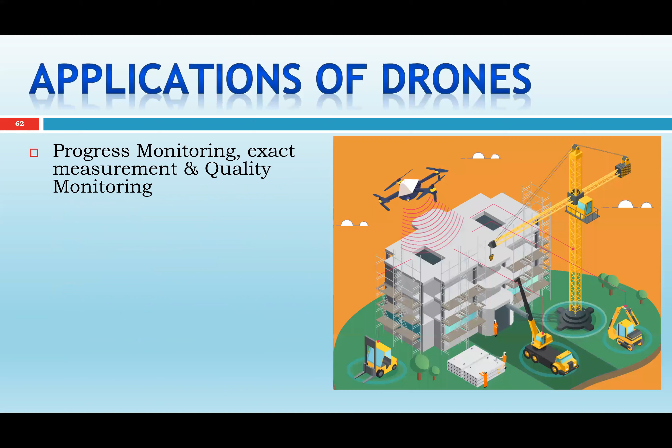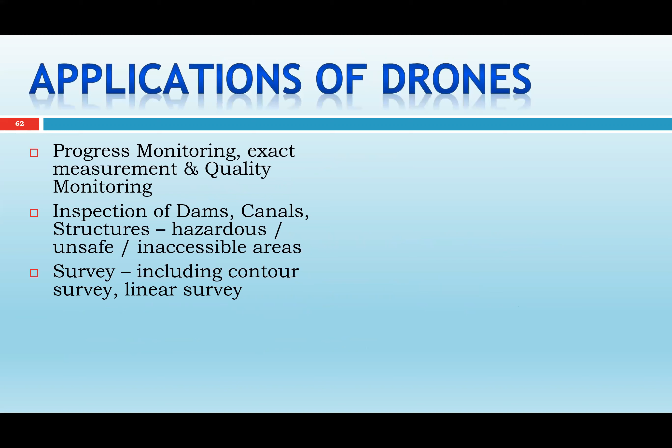This is the last slide. There are some good upcoming areas like drones. Drones can monitor the execution, inspect dams, help carry out contour surveys, and prepare 3D models. These drones are very successfully used for underwater surveillance and for obtaining aerial views.

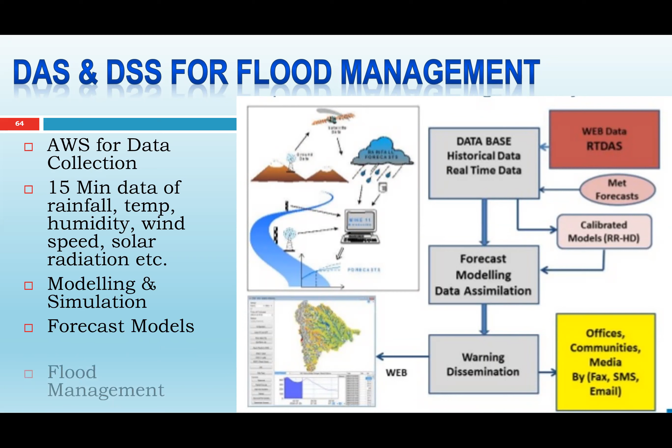Then there is SCADA for pipe irrigation networks, which monitors the release schedule of the canal system gates. Then there is ICT - we can use satellite images, drones, sensors for data collection, and artificial intelligence for data analysis. There is IoT SCADA for real-time monitoring and control, and this data can be managed very successfully through GIS.

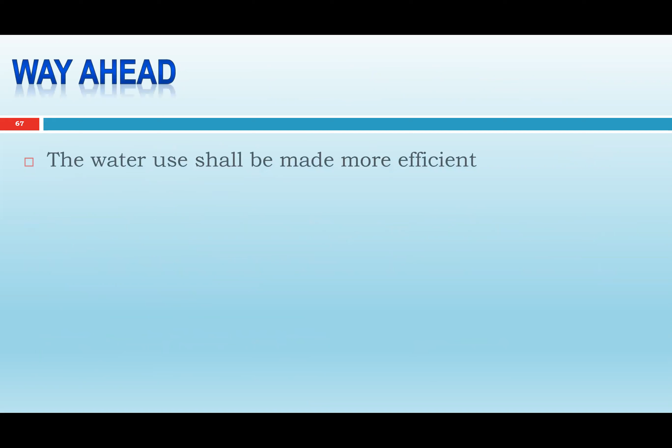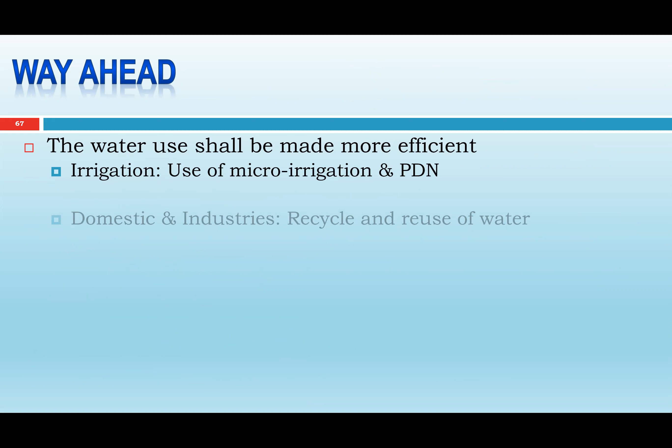That's all from my side. Thank you so much for your patient hearing. Thank you.

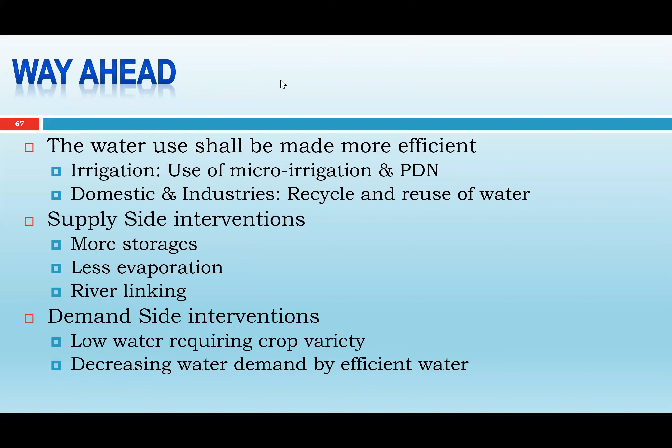Sure, thanks Shreyash. Thank you for such an enlightening lecture. I had another question out of curiosity.

Recently the central government launched a scheme called Atal Bhujal Yojana, which is basically for groundwater. It's not exactly a national scheme, but it covers selected states including Maharashtra. I wanted to understand, sir, since it's a World Bank program where the government is pitching in money along with the World Bank in the form of a loan, could you help me understand how such programs initiated by the central government, which also involve working and coordinating with the state government, are formulated in terms of consultation with the state government? Since it's a central government program done in coordination with the state government, what sort of consultations happen, and when on-ground implementation happens, could you help me understand that, out of curiosity.